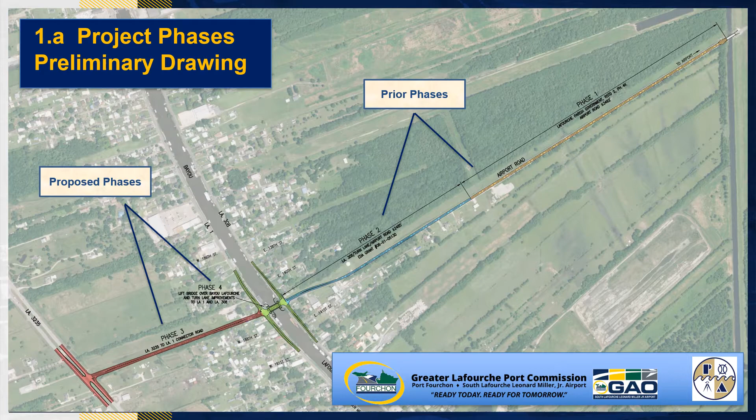Part 2: Project Goals and Objectives. This project includes 4 major goals. The goals or objectives include: A. Provide direct, safe connectivity to Port Fourchon and the statewide highway network. B. Enhance local connectivity to Louisiana 3235. C. Improve the resilience of the transportation infrastructure, industrial operations, and communities in Lafourche Parish and the Gulf of Mexico. And D. Improve the economic competitiveness of the South Lafourche area.

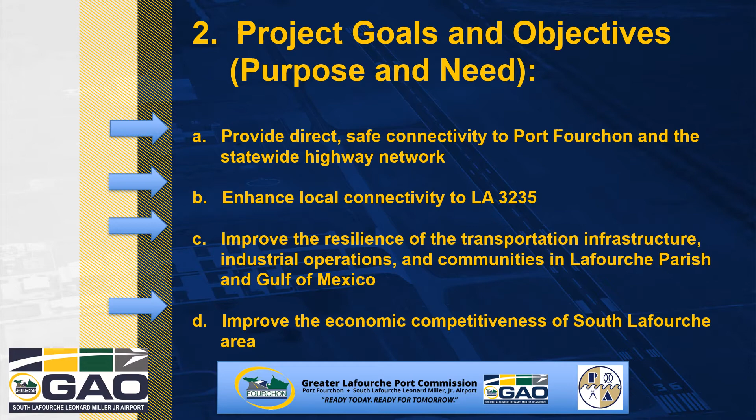Part 2A: Consistency with Urban Planning. Current development plans have been used as an evaluation tool for this project. The Houma Thibodaux Metropolitan Planning Organization provides transportation planning services for Lafourche Parish. The Metropolitan Transportation Plan and the Transportation Improvement Plan both include the subject project. In 2011, the South Central Regional Bicycle and Pedestrian Plan was completed. The proposed project includes sidewalks along the bridge, but an extended sidewalk system is currently not within the scope of work.

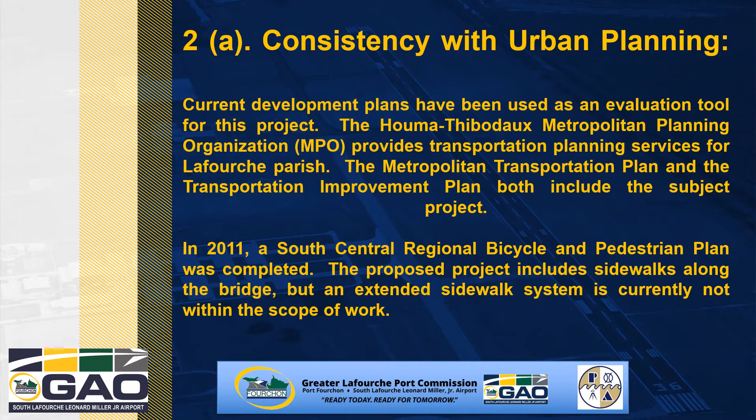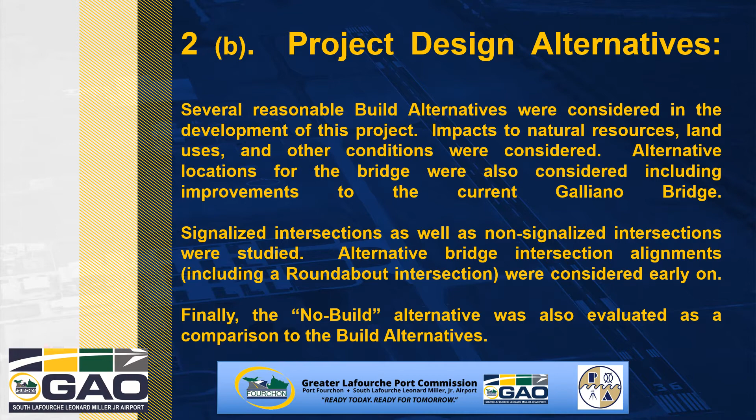Part 2B: Project Design Alternatives. Several reasonable build alternatives were considered in the development of this project. Impacts to natural resources, land use, and other conditions were considered. Alternative locations for the bridge were also considered, including improvements to the current Galliano Bridge. Signalized as well as non-signalized intersections were studied. Alternative bridge intersection alignments, including a roundabout intersection, were considered early on. Finally, the no-build alternative was also evaluated as a comparison to the build alternatives.

Part 2C: Public Information. Additional information relating to the project location and design recommendations are available to the public. The complete environmental assessment document is also available for review at the following locations: the South Lafourche Library, 16241 East Main Street, Cutoff; the Baton Rouge State Library, 701 North 4th Street, Baton Rouge; and the office of Picciola and Associates at 115 Picciola Parkway in Cutoff.

Contact Jack Plaisance at 985-632-5786 or jack@picciola.com for more information. The complete environmental assessment for this project is available for viewing at the Louisiana Department of Transportation environmental website at this address. Written statements may also be submitted via email to Jack Plaisance, Project Manager, Picciola and Associates, until Friday, August 28, 2020.

Part 2D: Encroachments on Floodplains. The impacts to the floodplain associated with the project will not increase the base flood elevation to a level that would violate applicable floodplain regulations. The drainage system affected by the project has been designed to maintain pre-construction hydrologic conditions and will not result in any substantive effect to base flood elevations of the surrounding area. The hydraulic design practices are in accordance with current LADOTD and FHWA design policies and standards. All elements of the project design and construction meet federal requirements, resulting in no adverse impacts on the floodplain. The Lafourche Parish Floodplain Administrator has no objection to the proposed project.

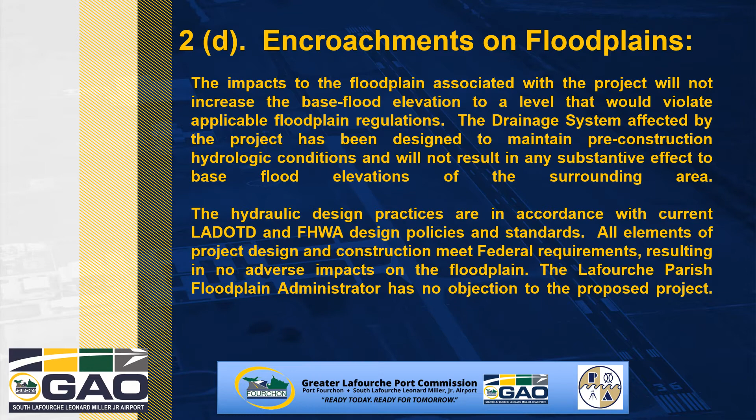Part 2E, Impacts to Wetlands and Other Waters.

The Louisiana Department of Natural Resources identified a small area of potential wetland impacts along the bank of Bayou Lafourche. The Greater Lafourche Port Commission purchased 0.05 acres of fresh marsh habitat at a cost of $3,241 for compensatory mitigation impacts. State Permit P 2019-1239 was issued on May 8, 2020, and is included in the Environmental Assessment Report. The Department of Army Corps of Engineers issued a PGP permit on May 13, 2020, also included in the environmental assessment. The Corps did not require additional mitigation credits to be purchased.

Part 2F, Section 106, 4F, and Section 6F impacts. As described in the environmental assessment, there are no parks or recreation areas within the study area. The Louisiana Department of Wildlife and Fisheries Office of Wildlife has stated that there are no state or federal parks, wildlife refuges, scenic streams, or wildlife management areas present. The bayou itself is used as a recreational resource, but is not considered a park for purposes of the 4F analysis. Because no parks or recreational resources are found in the study area, none are affected by the project, and none have benefited from land and water conservation funds.

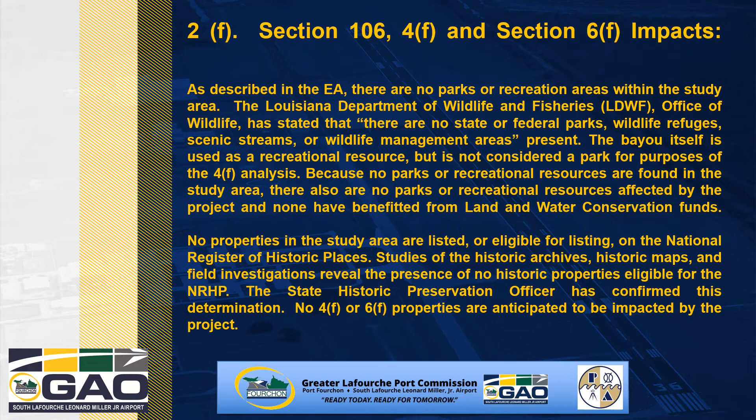Part 2G, Relocations. Construction of the proposed project would result in the conversion of existing land uses. One parcel containing a single-family residence and vacant land would be converted into a transportation right-of-way. The Port Commission is working to acquire the entirety of the 18276 West Main Street parcel.

The extension of Airport Road will require an estimated 4.93 acres of new right-of-way. The existing right-of-way along LA 1 and LA 308 will require minimal right-of-way areas, and LA 3235 is sufficient for the addition of the necessary turn, acceleration, and deceleration lanes. No land use change or relocations would result from these acquisitions.

Project engineers seek to avoid or minimize any such acquisitions while also seeking to meet state design standards. When acquiring property, the LADOTD and GLPC follow policy described in the Uniform Relocation Assistance and Real Property Acquisition Policies Act of 1970, as amended in 1987. LADOTD provides information on this policy to impacted landowners and interested individuals. Feel free to contact Jack Plaisance at the below contact information with any questions.

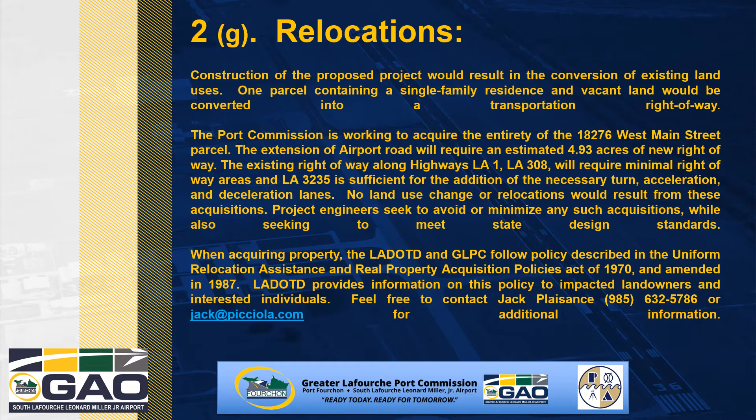Right-of-way acquisition and relocation. The LADOTD brochure explaining acquisition of right-of-way and relocation assistance program is available at this link, or can be obtained from the Louisiana Department of Transportation and Development Real Estate section at this address, or you can contact Jack Plaisance at jack@pciola.com, or 985-632-5786. We do suggest you read the brochure carefully. If you have any questions regarding your individual situation, consult with Mr. Bryce Autin of the Greater Lafourche Port Commission at this number.

Steps in the acquisition process. It is the DOTD's objective to pay just compensation for all properties required for the project. Owners of required properties may be contacted by an appraiser or appraisers and given the opportunity to go with them on the inspection of the property. This will provide owners an opportunity to point out things that may be important to the evaluation of the property.

All appraisals will be reviewed by a review appraiser and approved by DOTD. After review and approval, a real estate agent will contact each property owner and present a letter setting forth the amount of the DOTD's cash offer for the purchase of the property. He will also explain the property value and discuss any alternate offers, including possible options to keep and move any buildings, fencing, etc.

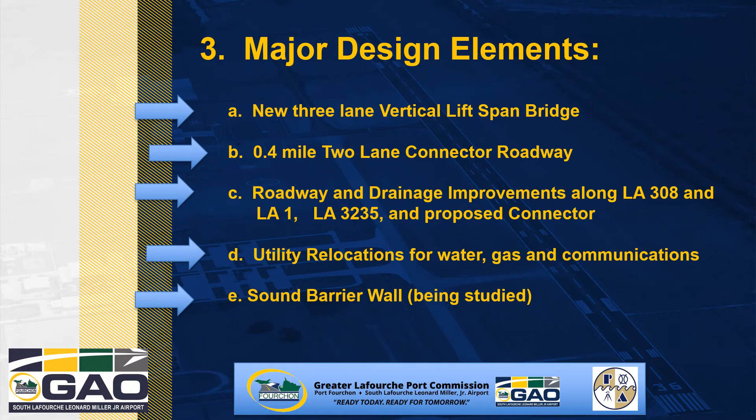The elements include: A. New 3-lane vertical lift span bridge. B. A 0.4 mile 2-lane connector roadway. C. Roadway and drainage improvements along LA 308 and LA 1, as well as 3235 and the proposed connector. D. Utility relocations for water, gas, and communications. E. A sound barrier wall is currently being studied for possible use in this project.

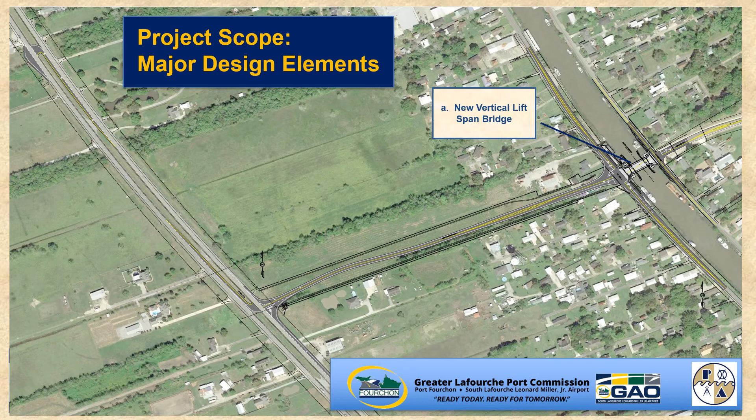Project scope, major design elements. Here we can see the location of the major elements on a vicinity map. A. New vertical lift span bridge. B. New connector roadway. C. Road and drainage improvements throughout the project area. D. Some utility relocations along the LA1 and LA 308 corridors.

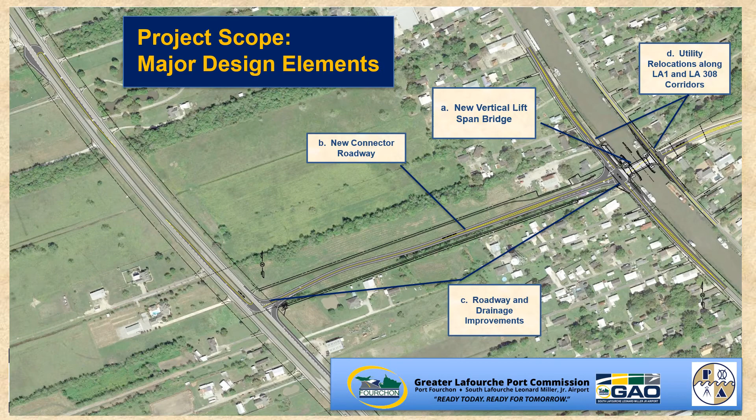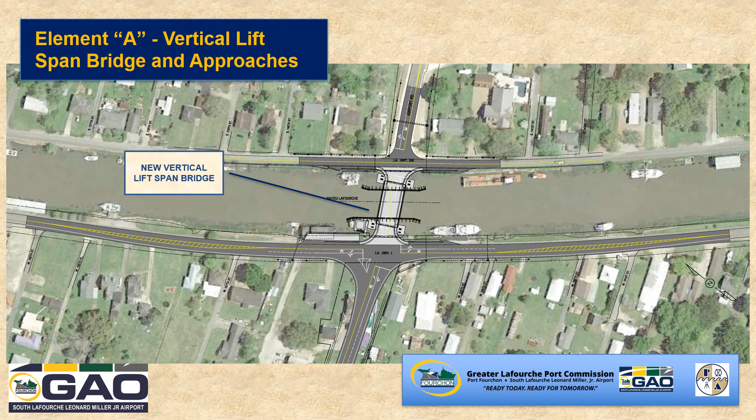Zooming in on the location of the proposed bridge, we can see that it is a 3-lane lift-span concrete structure across Bayou Lafourche. The existing roadways adjacent to the bridge will be realigned and overlaid. This proposed bridge will be similar to the LA1 to LA 308 bridge in Mathews.

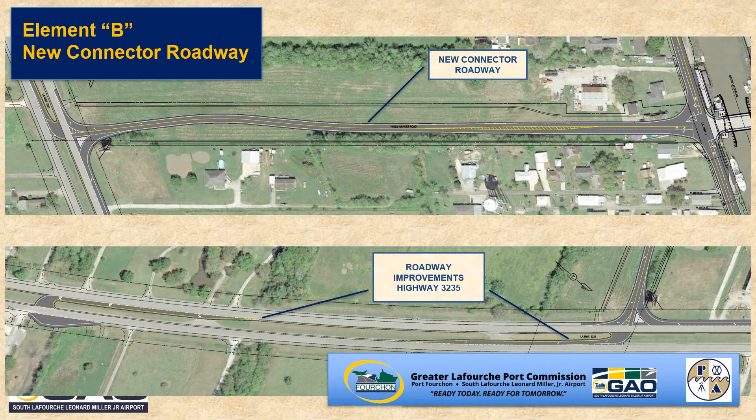The second major element is the connector roadway. This roadway is approximately 4/10 of a mile long and will provide direct access from Louisiana 3235 to the South Lafourche Leonard Miller Airport. The proposed asphalt roadway will also include incidental drainage improvements along the new corridor.

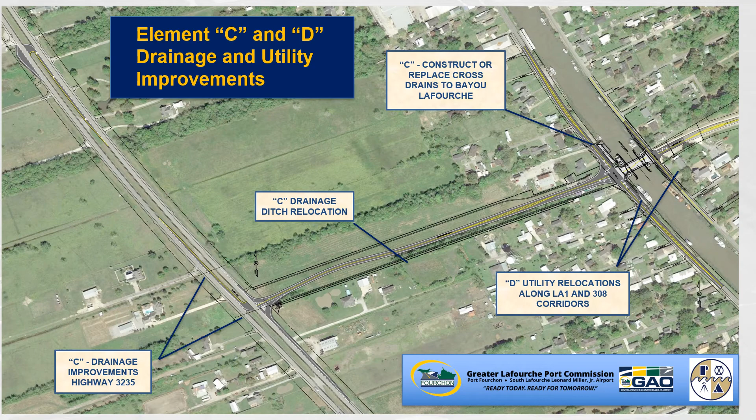Elements C and D, drainage and utility improvements, can be seen on this vicinity map. Element C includes drainage improvements along the new corridor, LA 308, LA 1, and across the 3235 highway. Element D will include required utility relocations near the proposed bridge, due to slight widening of the roadways.

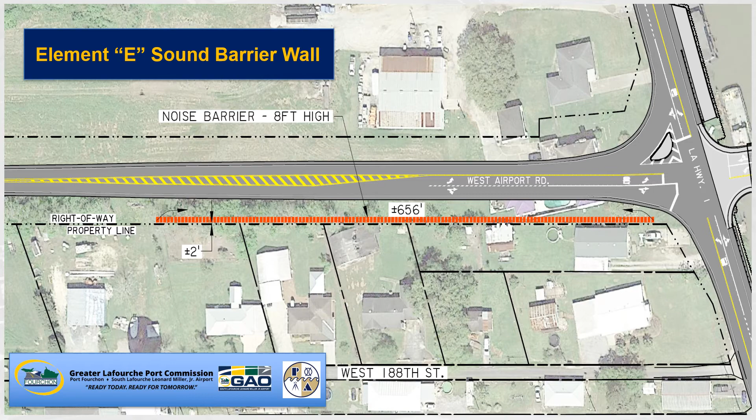Part 4, Project Impacts. The next section describes the anticipated impacts of the proposed project.

Construction impacts to landowners. Roadway improvements, Highway 3235. The connector roadway will be directly accessible from LA 3235. Entrance and exit accesses are being developed at this time for approval by the Department of Transportation and the Federal Highway Administration. These elements will be designed to provide safe access to and from the proposed connector. Landowners along the west right-of-way should experience minimal impacts as the improvements should not require additional right-of-way acquisition. Landowners along the east right-of-way may experience minimal widening of the highway right-of-way, especially in the vicinity of the connector.

Roadway improvements, LA1 and LA 308. During construction, landowners along LA1 and LA 308 will experience some traffic impacts, minor noise impacts, and will be in proximity of the bridge construction work. Temporary traffic detours and reduced speed limits and other delays in the traffic flow should be expected.

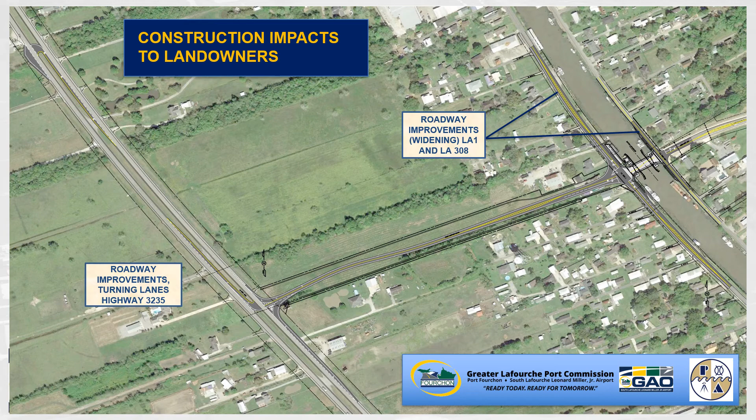Utility relocations along LA1 and 308 corridors. As mentioned, the widening of these roadways will require the relocation of some buried utilities. Landowners should expect to see typical excavation activities associated with this type of work. Residents should stay clear of these areas as much as possible. Upon completion of the work, these changes should not be noticeable.

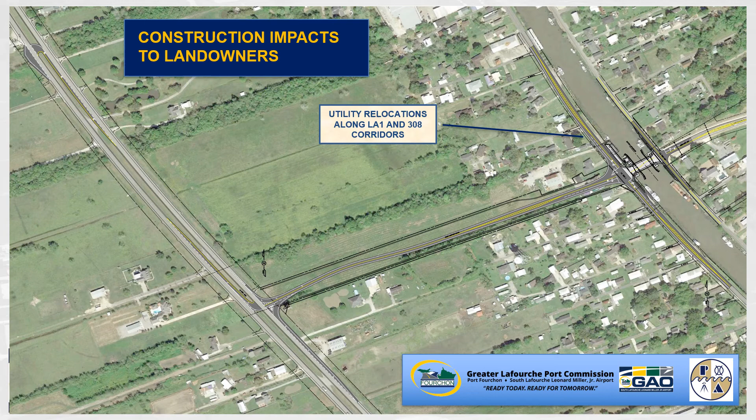Bridge footprint, sheet pile stabilization, guardrail, and fender system. The proposed bridge will be the most dramatic impact during construction. The east and west banks of Bayou Lafourche will be modified to protect the roadways from erosion and allow for safe movement of traffic. Navigation along Bayou Lafourche will occur in the same fashion as other bridges in the area. The bridge structure will be protected from impacts by a timber construction fender system. A bridge operator will control automobile and waterway traffic across the structure.

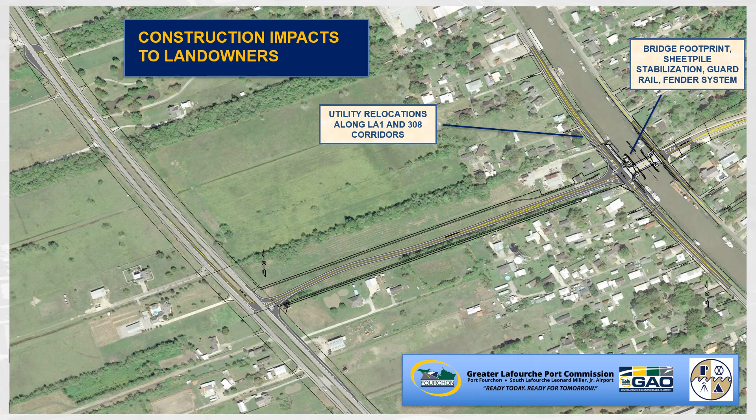Land acquisition along new connector roadway. The largest impact to landowners will occur at the location of the proposed connector roadway. The Port Commission is currently finalizing the acquisition of this property. During construction, there may be minor noise impacts. Drainage in this area and the adjacent properties will be improved at the completion of the project.

Drainage ditch relocation. The existing ditch immediately to the south of the connector roadway will be regraded to facilitate positive drainage in this area. The details of this element are currently being designed. Construction impacts should be minor.

Construct or replace cross drains to Bayou Lafourche. We are anticipating that several cross drains under LA1, LA308, and LA3235 will be replaced in the project. Temporary traffic impact should be expected. These changes will facilitate improved drainage into Bayou Lafourche and to the outfall canals west of 3235.

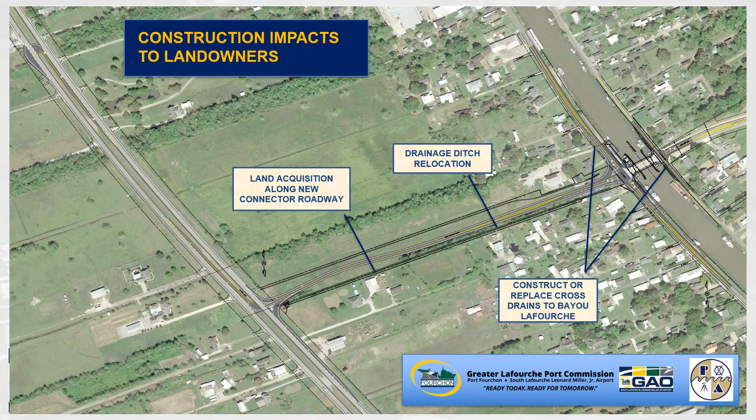Part 5, Funding Sources and Schedule. Part 5 provides a breakdown of the current funding sources and current target dates to project completion.

For funding, the BUILD grant contributes $16,422,000 to the project. The state of Louisiana contributed $9,350,000. Both the Lafourche Parish Government and the Greater Lafourche Port Commission have contributed $4,675,000 for a total project budget of $35,122,000.

Current target dates. The traffic study was recently completed. Environmental permitting and right-of-way acquisition is ongoing. 100% bid documents and the project walkthrough is anticipated to take place in September of 2020. Bid advertisements are anticipated to take place in November of 2020. Construction work is expected to start in January of 2021.

Utility relocation should be completed by mid-February of 2021. And all project construction work is expected to be completed in March of 2024.